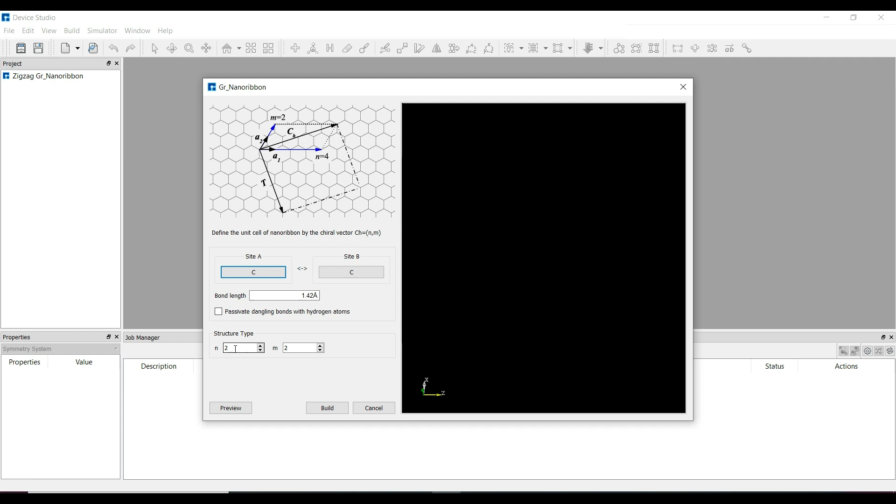You can also select the bond length, passivate with hydrogen atoms, and set the chiral vector n and m value. I have selected 2 by 2, and I would like to click on the preview option. Here you can see this is the zigzag graphene nanoribbon.

I would like to click on the Build option. This is the project window where input and output files will be shown, this is the property window where the property of our whole structure will be shown, and this is the job manager.

You can see this structure is quite thin, so it is better to increase the length. I would like to click on the Build option, and then click on Redefine Crystal.

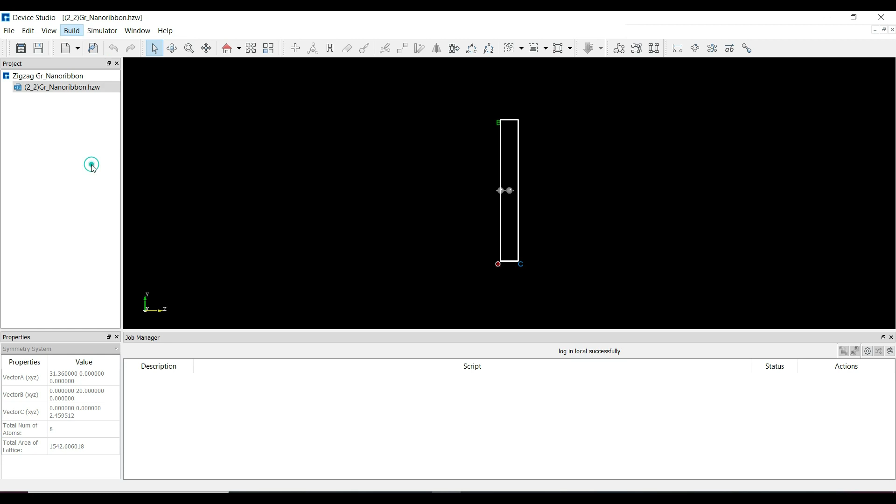I would like to increase the length 15 times in the direction of C, and then click on the preview option. Here you can see the length of this graphene nanoribbon has been increased. So I would like to click on the Build option.

So this is the 2 by 2 zigzag graphene nanoribbon structure. Now, to make a device structure, I would like to click on the Convert to Device option.

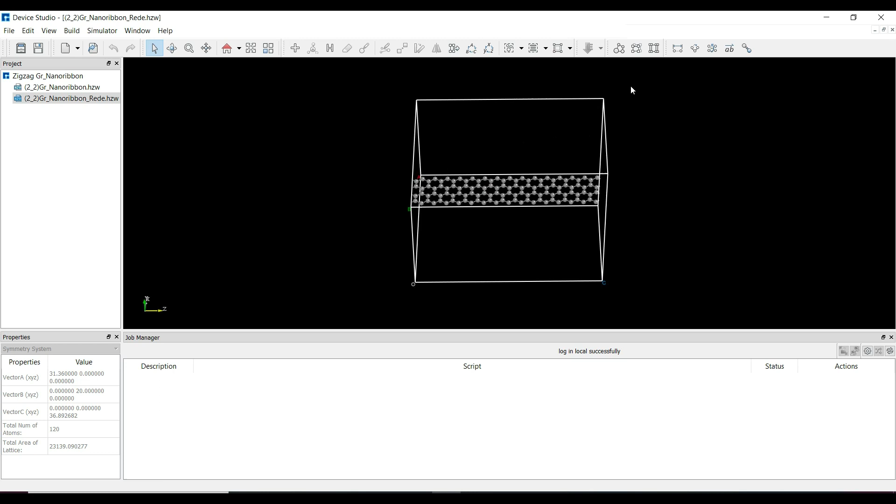You can define left electrode, right electrode, bottom electrode, top electrode, front electrode, and back electrode. In this structure only two electrodes are possible: left and right.

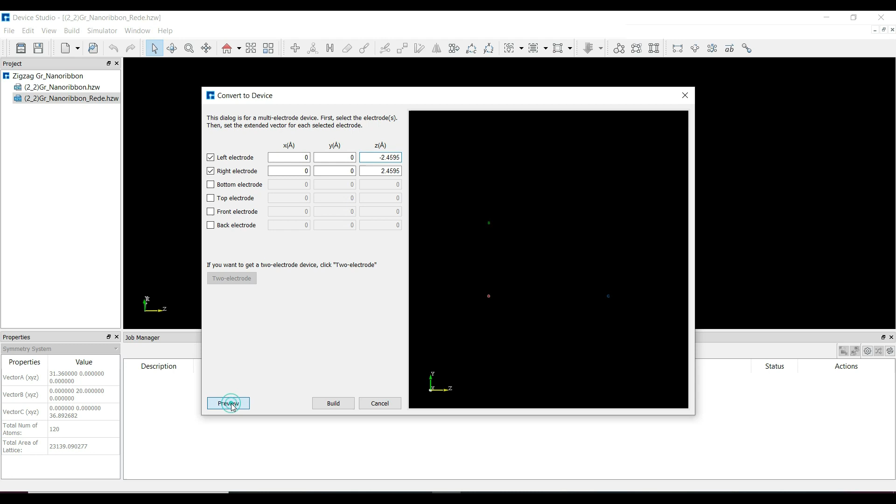So I would like to select the left electrode and right electrode, and here you can also change the electrode value as per your need. I would like to click on the preview option. Here you can see the electrode has been created: this is the left electrode, right electrode, and this is the center region. So I would like to click on the Build option.

To simulate this zigzag graphene nanoribbon structure, I would like to click on the simulator, select this Nanodcal, and here you can choose the self-consistent field calculation. This is the self-consistent field calculation parameter.

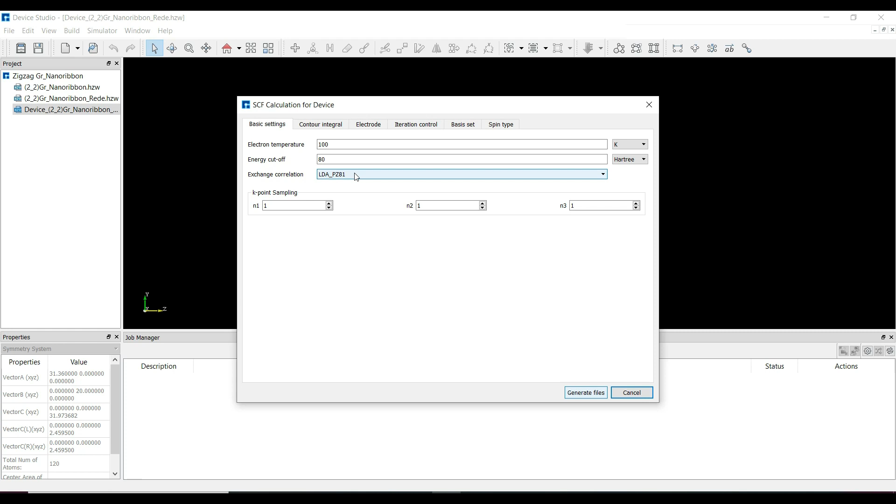You can change electron temperature, cutoff energy, exchange correlation, LDA, GGA, K-point sampling. This is the contour integral. This is the electrode parameter, where you can see left electrode, right electrode, and this is the iteration control, density matrix.

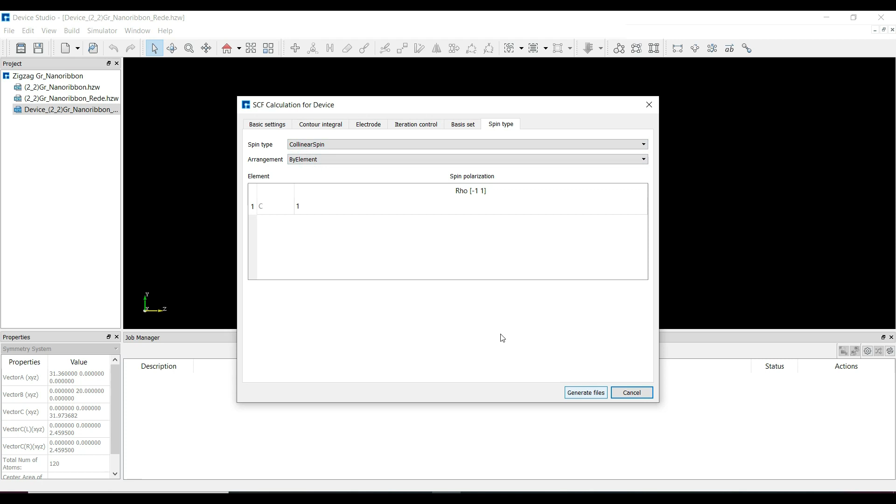Hamiltonian matrix, total energy, and this is the basic setting. And if you want to include some spin topics application like collinear spin, general spin, I would like to select collinear spin, and then click on this generate file. Once I click on generate file, in the project window you can see the SCF input file device region,

left electrode and right electrode has been generated. This is the SCF input for device, click on open with, and this is the script for this device region. Here you can see what parameter we have defined.

This is the basic settings, description of electrode, and this is the contour integral, and I have selected collinear spin, and this is the iteration control, and this is the atom and their Cartesian coordinate point. So first you need to run this electrode parameters, and then you can run this center region.

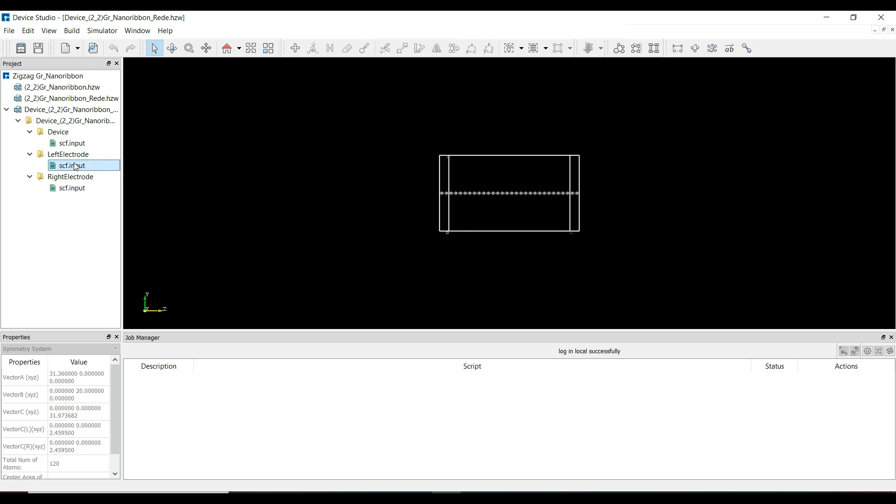I would like to click on the run option, and here you can define the number of parallel cores. Suppose if you want to run this job in parallel, 5 core, 10 core, 15 core. In my computer 4 core is there, so there is no limitation of core. You can define up to 120 core rate easily. I would like to click on run option to run this job.

So you can run this SCF input for the right electrode as well, and then you can run this SCF input for the device region. On the bottom of the page you can see this is the job manager, and this is the status of your project. In the meantime you can select the transport properties.

I would like to click on the simulator Nanodcal, and then click on the analysis. This is the transport property, this is the device parameter, and if you want to show the left electrode, this is the left electrode parameter. So here you can choose what parameter you want to define from this structure.

I would like to select density of state, total energy, scattering state, transmission, IV calculation, electron density, potential. This is the density of state parameter, K point sampling, number of energy point, energy range. This is the scattering state, and this is the transmission, K point sampling, number of energy point, energy range, and this is the IV calculation.

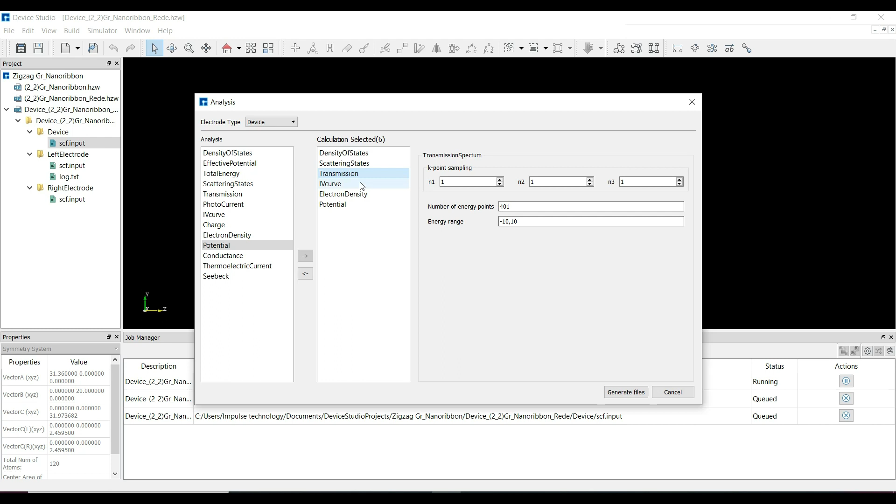Here you can click on this generate file, and once you click on this generate file, the analysis input file will be generated, and you can run all the analysis parameter as well.

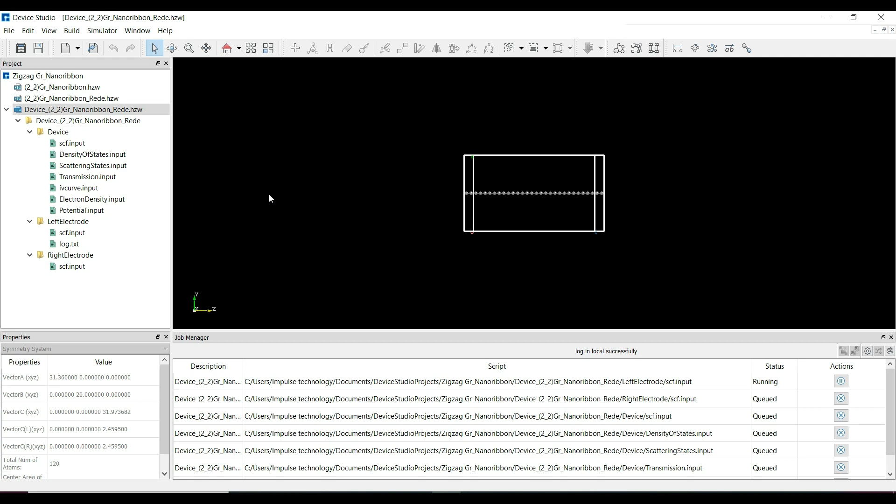So in order to get the spin current as a function of voltage, we should perform the self-consistent field calculation considering different source voltage. In the SCF input you can see there is no voltage defined, so you can copy this project. To get spin current as a function of voltage, we need to run this SCF input for the 0.2 voltage.

I would like to click on the simulator, go to the Nanodcal, and here I would like to select this self-consistent field calculation, and here I need to define the voltage point. Here you can see left electrode is 0 voltage and right electrode is 0.2 voltage, and then I would like to click on the generate file. This project is for the 0 biasing voltage, and this project is for the 0.2 voltage.

Similarly you can run all this SCF input, and then also you can choose the analysis parameter, select this Nanodcal, go to the analysis part, and here you can select this IV calculation, and then click on this generate file. You need to run all this SCF input and IV input as well. Similarly you can copy this project, and this project is for the 0.4 voltage.

I would like to click on the simulator, go to the Nanodcal, click on the SCF input, and here define the voltage as 0.4, select this collinear spin as well, and then click on generate file.

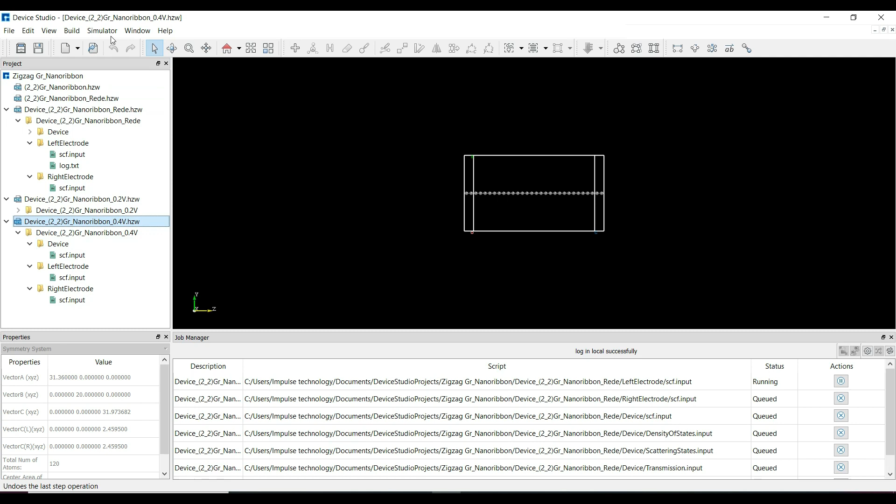You can run all these input parameters, then click on the simulator Nanodcal, choose the analysis parameter, select this IV curve, and click on generate files. Again you can copy this project, and this is for the 0.6 voltage, then click on OK, and here you can see this project is for the 0.6 voltage.

Again click on the simulator Nanodcal, go to the SCF calculation. Define the voltage 0.6, select the spin type collinear spin, and click on generate files. You need to run all this SCF input, then click on the simulator Nanodcal, choose the analysis, define the IV curve, and click on generate file.

Again you can copy this project, and this project is for the 0.8 voltage, then click on OK. Select this 0.8 voltage, go to the simulator Nanodcal, select the SCF parameters, define the voltage as 0.8, again spin type collinear spin, and click on generate file.

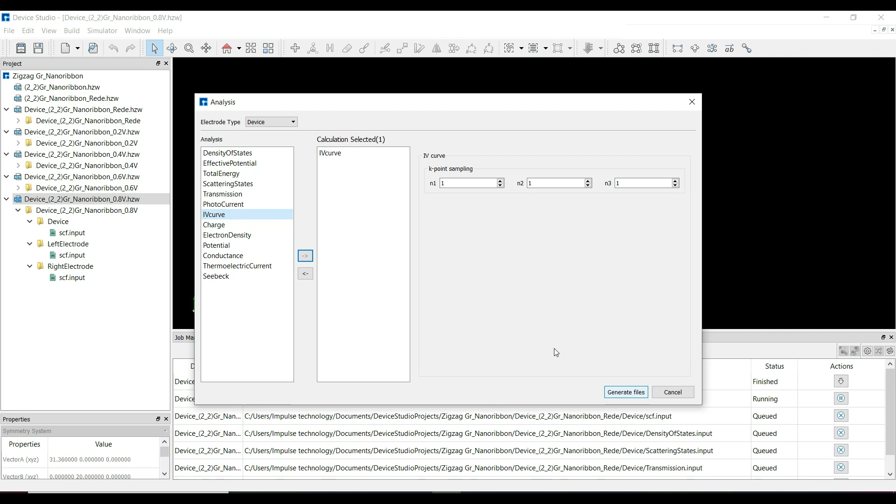Again you need to run all this SCF input. First run this electrode, right electrode, then run this SCF for the device, then go to the simulator Nanodcal, select this analysis parameters, select this IV curve, and click on generate file. Again copy this project, and this project is for the 1.0 voltage, then click on OK.

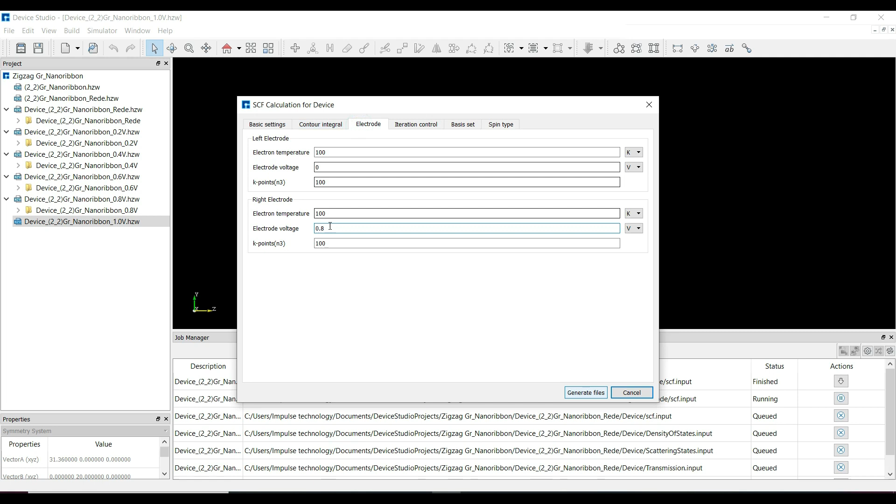Select this 1.0 voltage, go to the simulator Nanodcal, choose the SCF parameter. This is the electrode, and here you need to define the voltage as 1.0, also choose the spin type collinear spin, and click on generate file.

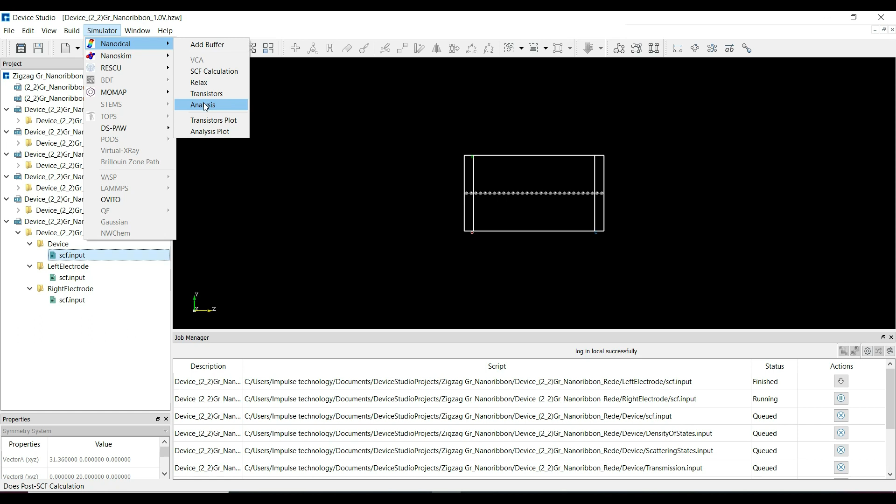Again you need to run all the SCF input, then click on this SCF input for the device, again go to the simulator Nanodcal, choose the analysis, select this IV curve, and click on generate files. You can run this IV curve input file as well.

Once all this SCF input calculation finishes, their output will be generated, so you can wait until the calculation finishes. In job manager you can see all this SCF input parameter and IV parameter has finished and their output has been generated. You can see this is the density of state.

You can right click and click on show view, and this is the density of state with respect to energy. Here you can see this is the spin up, and if you want to show the spin down, this is the spin down, and this is the spin up and spin down graph.

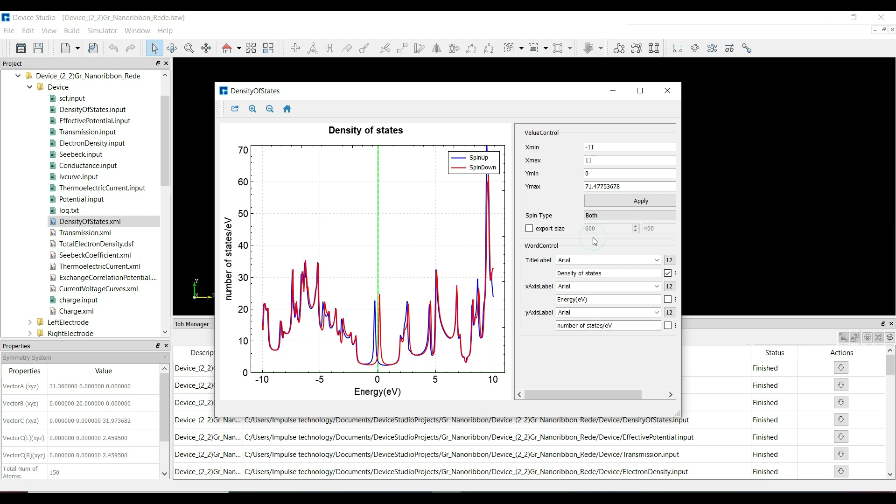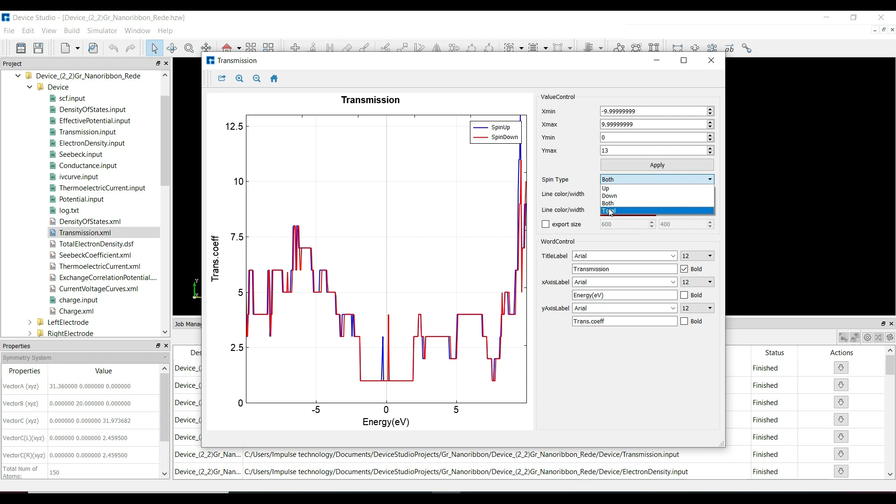This is the transmission: spin up transmission, spin down transmission, and this is both spin up and spin down, and this is the total transmission with respect to energy.

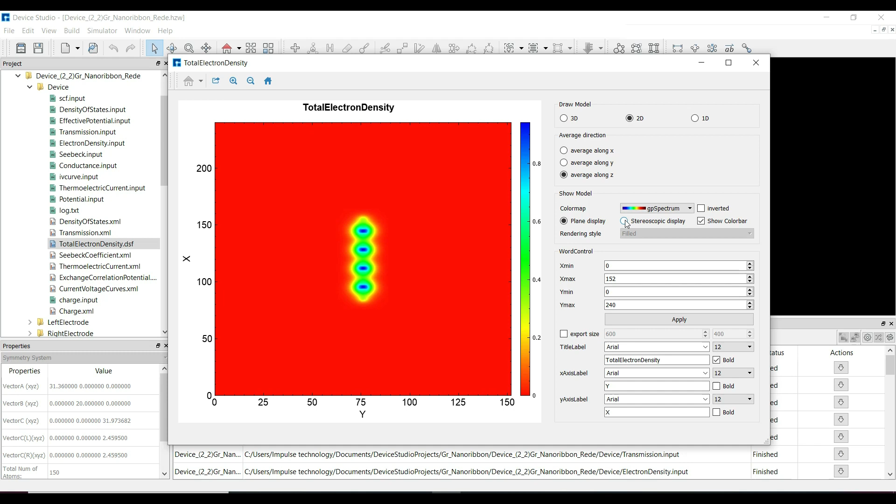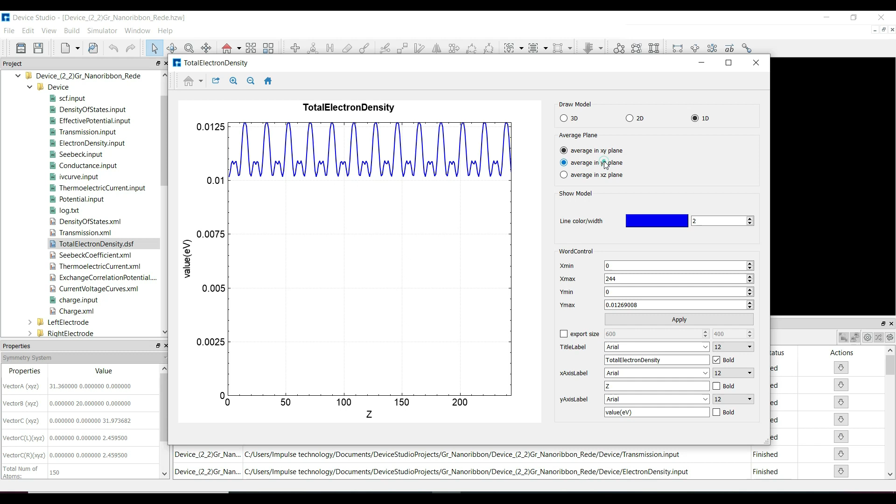This is the plane display. If you want to show the stereoscopic display, this is the stereoscopic display along z-axis, y-axis, x-axis, and this is the 1D view along xy plane, yz plane, xz plane. So 3D, 2D, 1D view is also possible.

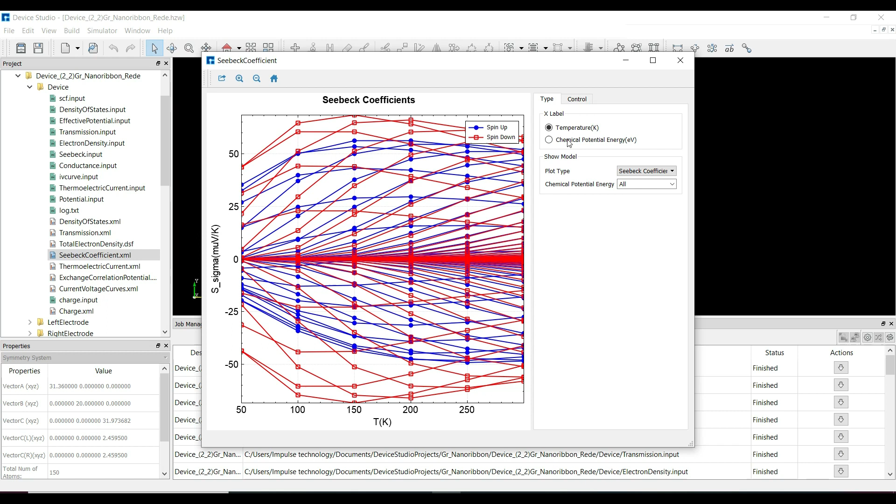This is the Seebeck coefficient, shown along temperature, and if you want to show the chemical potential energy, this is the Seebeck coefficient along with the chemical potential energy.

This is the exchange correlation of this graphene nanoribbon structure.

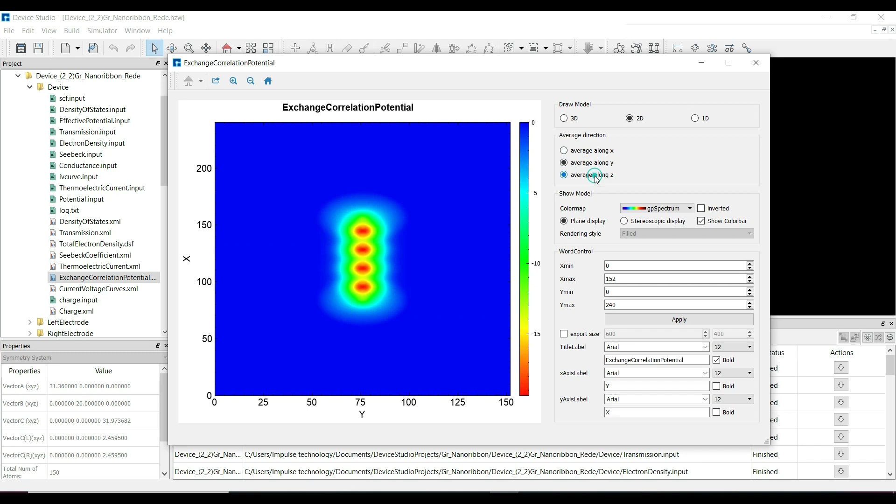This is the 3D view, and if you want to show the 2D, this is the 2D along x-axis, y-axis, z-axis. This is the plane display. If you want to show the stereoscopic display, this is the stereoscopic display along z-axis, y-axis, x-axis, and this is the 1D view along xy plane, yz plane, xz plane.

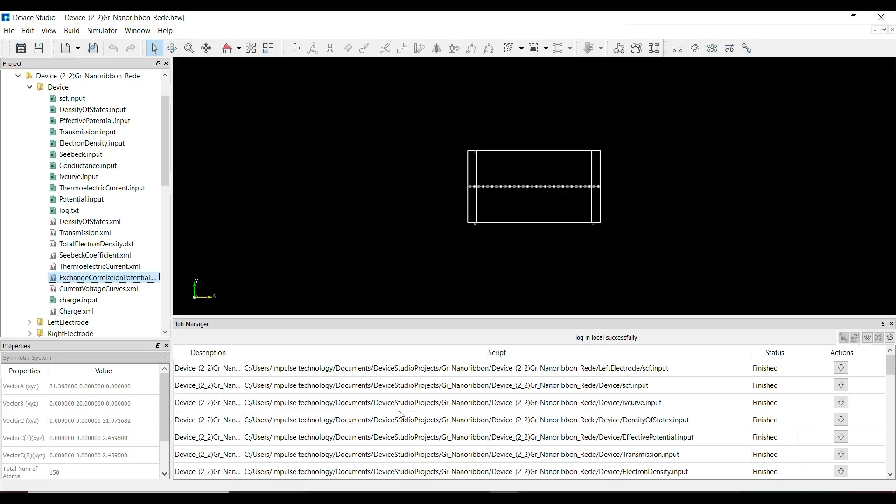This is the current voltage curve.xml file, and this file will open in MATLAB. So I would like to open my MATLAB. Here you can relocate your project and enter the location of your project. This is the location of my project, and you can click enter. Here you can see the project and its output files: 0.2 voltage, 0.4 voltage, 0.6 voltage, 0.8 voltage, and 1.0 voltage.

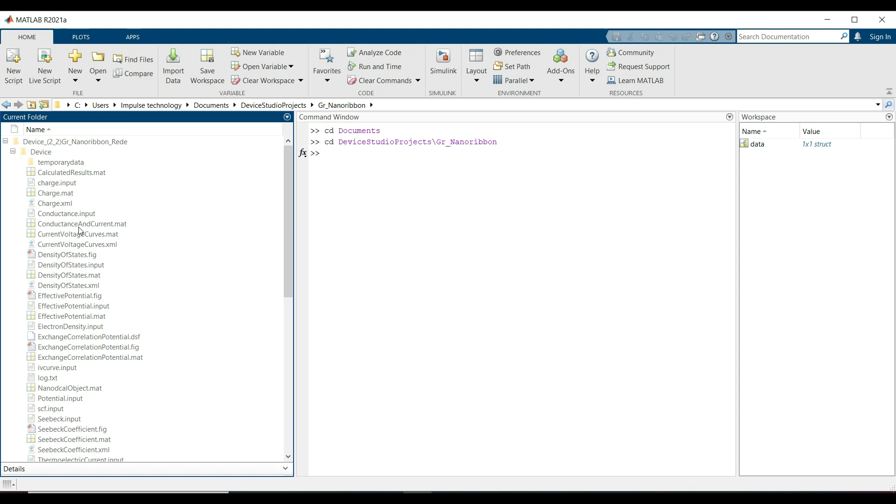So you can click on this device, and here you can see this is the MATLAB file. You can select this current voltage curve.mat file. Here you need to type the data.

You can see voltage is 0 and current is minus 1.5078 into 10 to the power minus 5. Here you can see voltage as 0.2 and current is 1.5078 into 10 to the power minus 5. Here you can click on this data, and once you click, this interface will open. Here you can see V1 is 0, I1 is minus 1.5078 into 10 to the power minus 5, and this is the spin up and spin down current. This is V2 at 0.2 voltage, and I2 is 1.5078 into 10 to the power minus 5, with its spin up and spin down current.

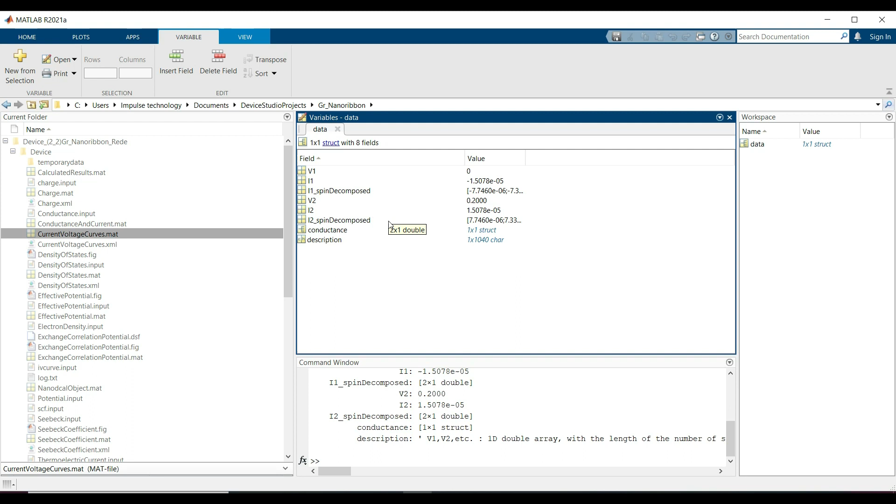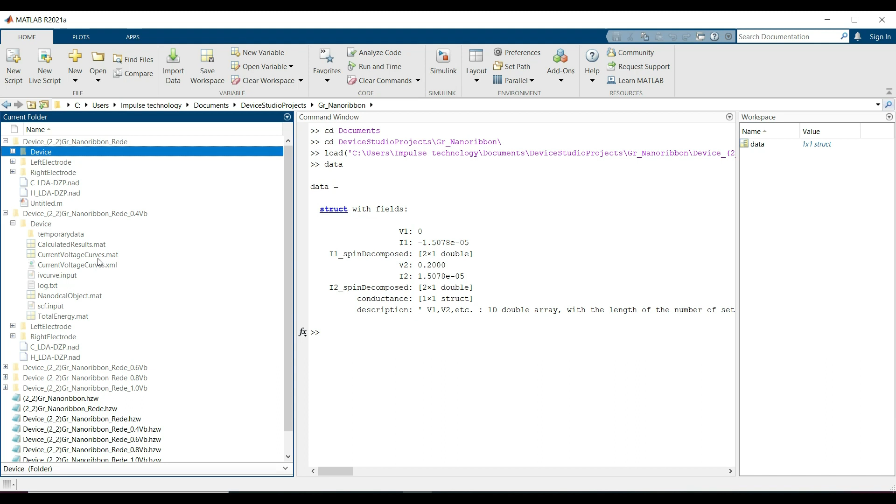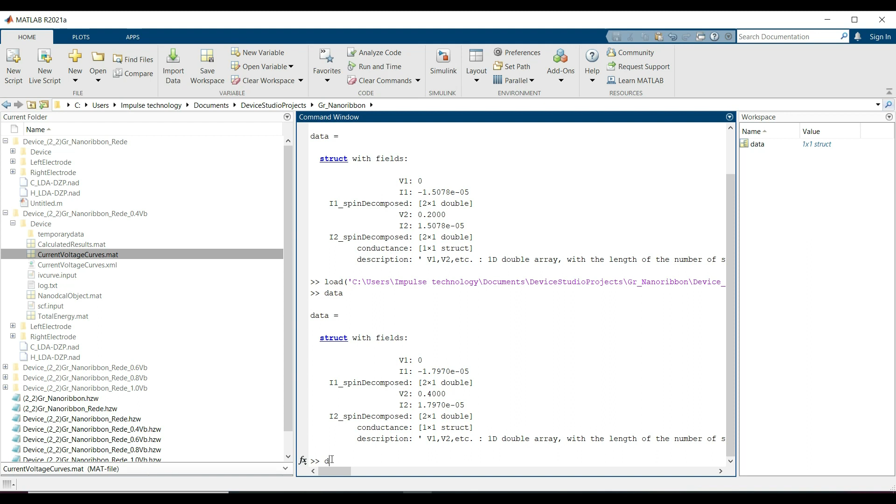Again you can select the 0.4 voltage, select this device, and double click on this current voltage curve.mat file, then type the data. Enter V1 is 0, I1 is minus 1.7970 into 10 to the power minus 5, and V2 is 0.4 voltage, with I2 1.7970 into 10 to the power minus 5. Here you can type data.I1 spin decomposed, and click enter to see the value of spin up and spin down.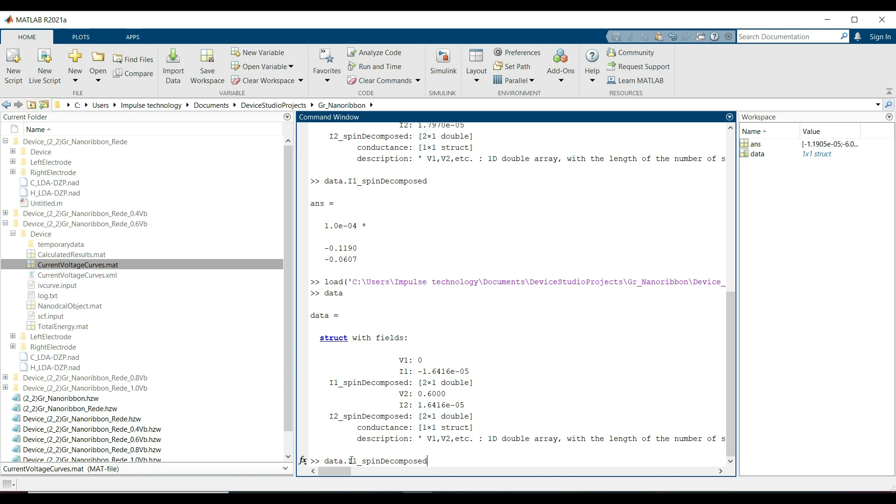Again you can select this 0.6 voltage project, select this device, and click on this current voltage curve.mat file. Type the data and enter, and here you can see V1 is 0, I1 is minus 1.6416 into 10 to the power minus 5, V2 is 0.6 voltage, and I2 is 1.6416 into 10 to the power minus 5. Again you need to type this script, and here you can see the value of spin up and spin down current. So all the output files you can show like that.

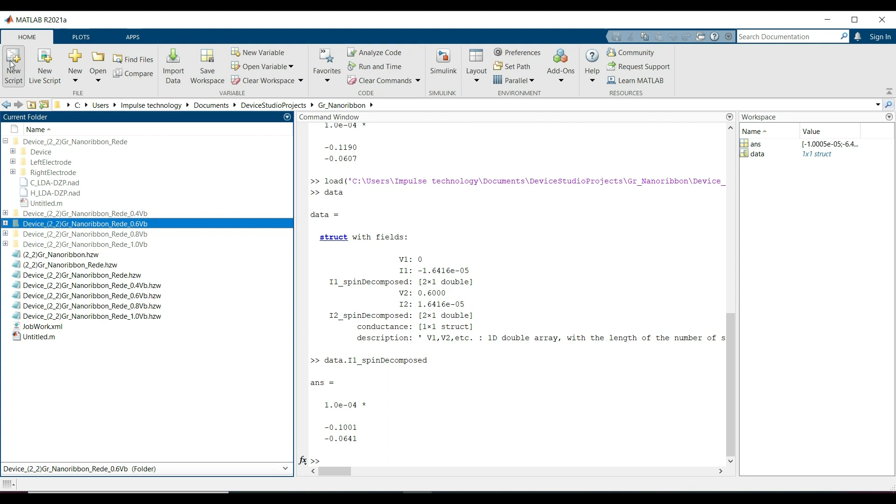And for the final graph you can click on this new script. Once you click on the new script, this interface will open, and here you need to write the script. First I would like to comment output of spin current, and here I would like to define the voltage V1 equal bracket, V2 equal bracket, and in the bracket you can define the output of this voltage V1, V2, I1, I2.

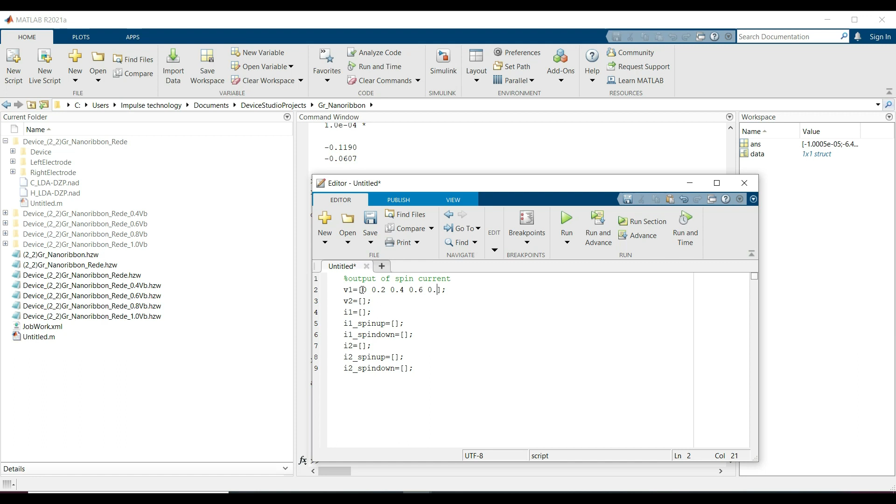In V1 you can enter the voltage values 0, 0.2, 0.4, 0.6, 0.8 and 1.0. And in I1 you can copy this I1 value, and here you need to paste it. This is the value of I1.